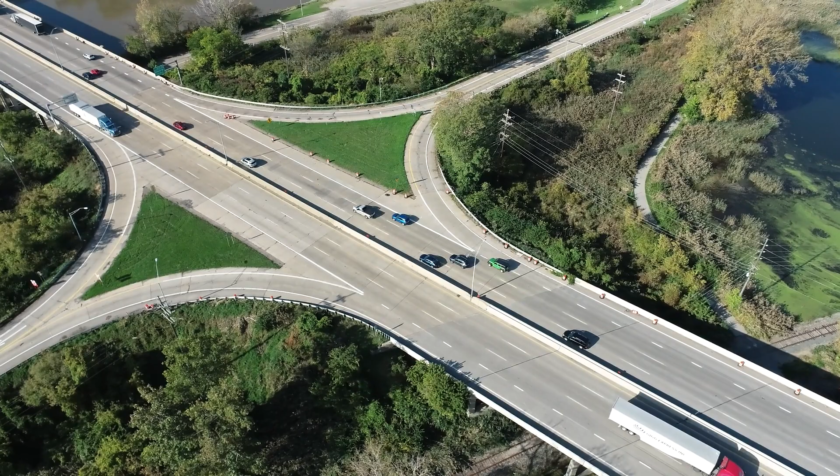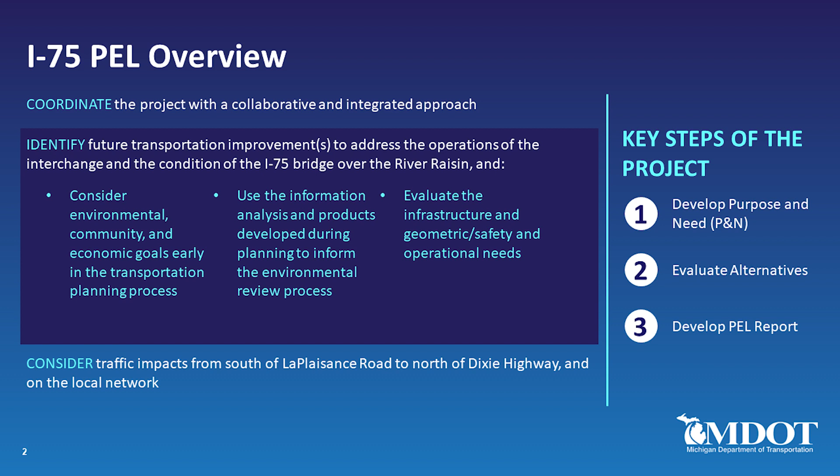To learn more about the Planning and Environmental Linkages, or PEL study, the Michigan Department of Transportation is conducting on I-75 in Monroe, Michigan. MDOT is using the PEL process to identify future transportation improvements in this area through a collaborative and integrated approach while considering environmental, community, and economic goals early in the transportation planning process. MDOT is building on previous studies conducted by the City of Monroe and others to understand the unique transportation challenges of this area and spark ideas for consideration.

The specific study area we are focused on is the I-75 bridge over the River Raisin, as well as the Elm Avenue and Front Street interchanges. However, we will study how any changes to this area would impact I-75, the Dixie Highway interchange, LaPlaisance Road interchange, and the local road network.

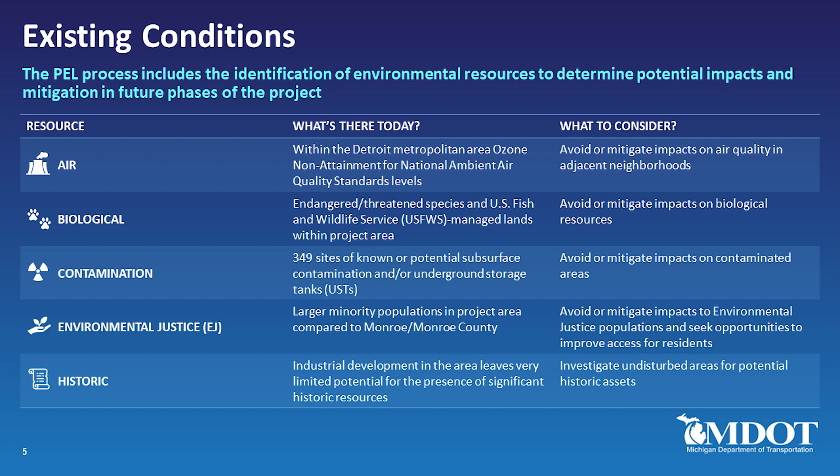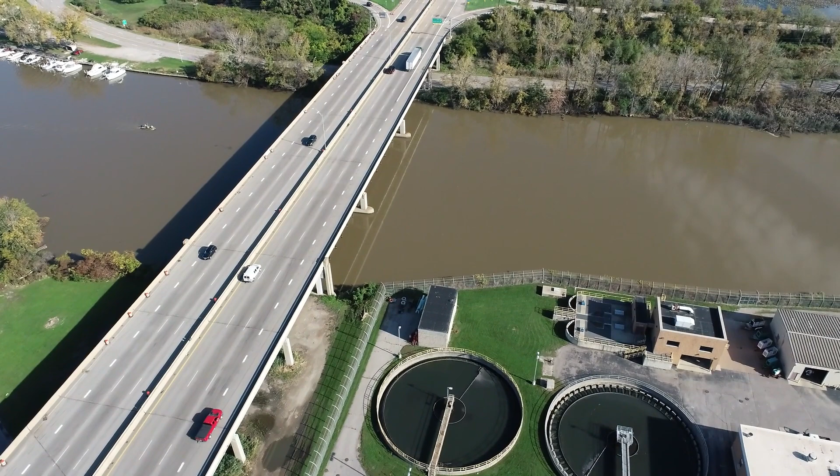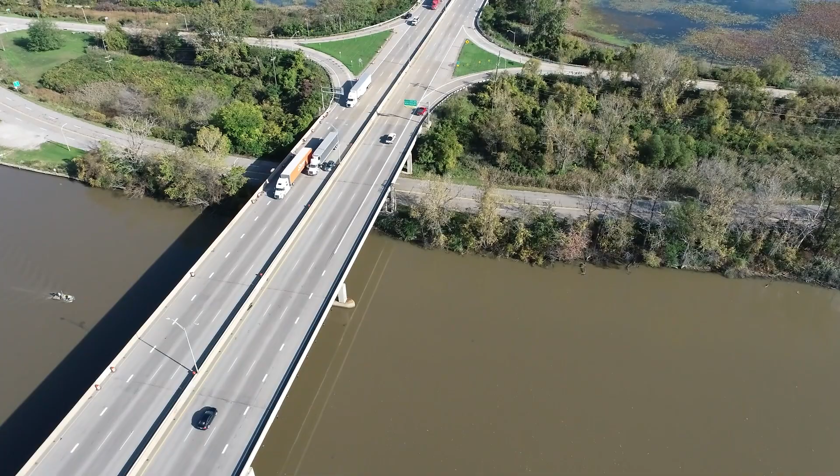The PEL study identifies environmental factors to determine potential impacts. These factors include air quality, biological, contamination, environmental justice, historic, noise, recreational, traffic, and water resources. The goal is to avoid impacts to environmental assets, mitigate impacts if they are likely to occur, and use the project to enrich these assets where possible. For example, by providing more access for environmental justice populations and improving connections to recreational assets in the area.

MDOT previously met with our local advisory committee, the community, and stakeholders this past summer to understand some of the current challenges and opportunities in this area. Key considerations identified at those meetings included traffic operations, active transportation, and access to recreational assets, continued industrial growth along Front Street, and the desire to create a gateway from I-75 to downtown Monroe.

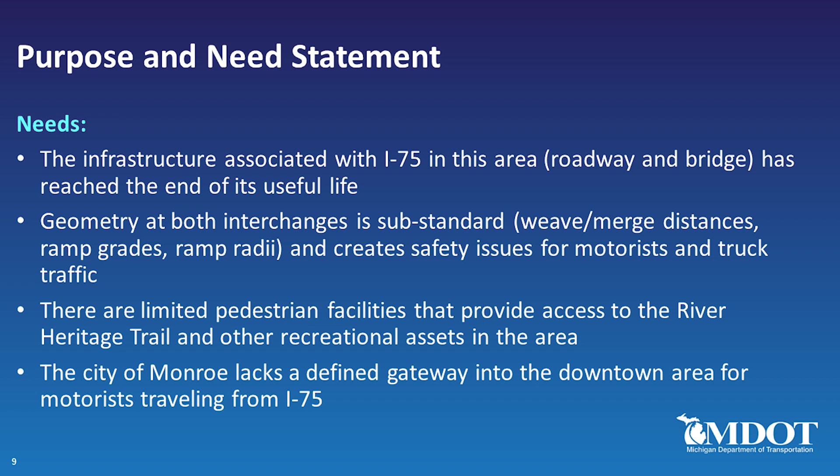Emerging from our engagement with stakeholders and the community was the purpose and needs statement for the project, which serves as a foundation of the PEL process and allows MDOT to analyze potential options to ensure they meet the purpose and need of the study.

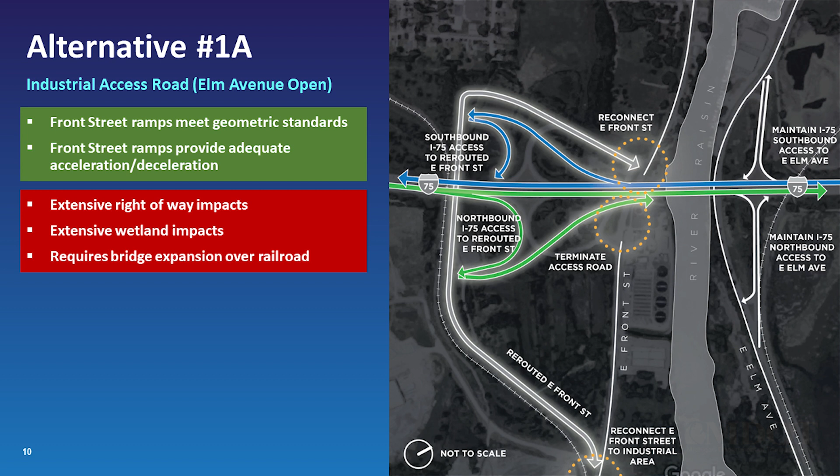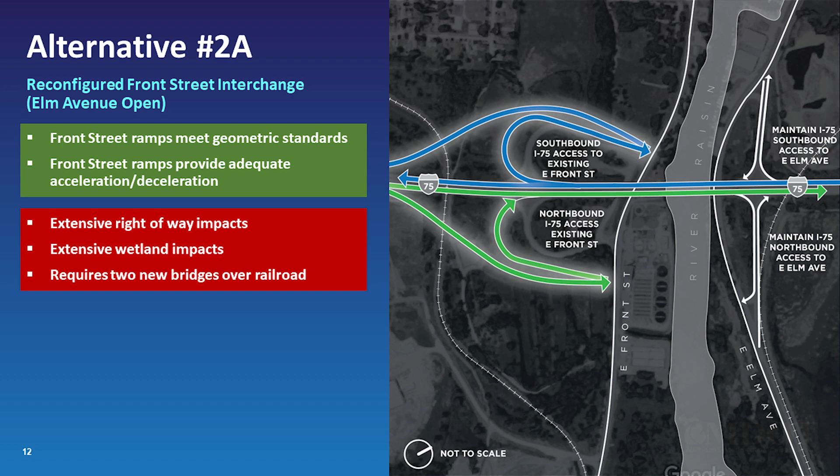Alternative 2A would reconfigure the Front Street interchange without relocating the street itself, allowing easier and safer access to the freeway with the same moderate improvements to the Elm Avenue interchange as in the previous alternative. This option would make the Front Street interchange much safer, but would encroach into adjacent property and wetlands, while also requiring 2 new bridges over the adjacent railroad.

Alternative 2B includes the same modifications to Front Street, but also closes the Elm Avenue interchange, allowing for safer merging and weaving of traffic on I-75.

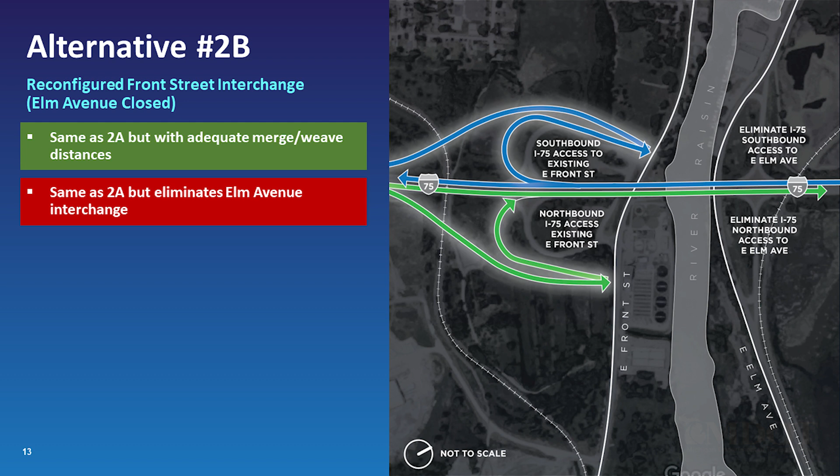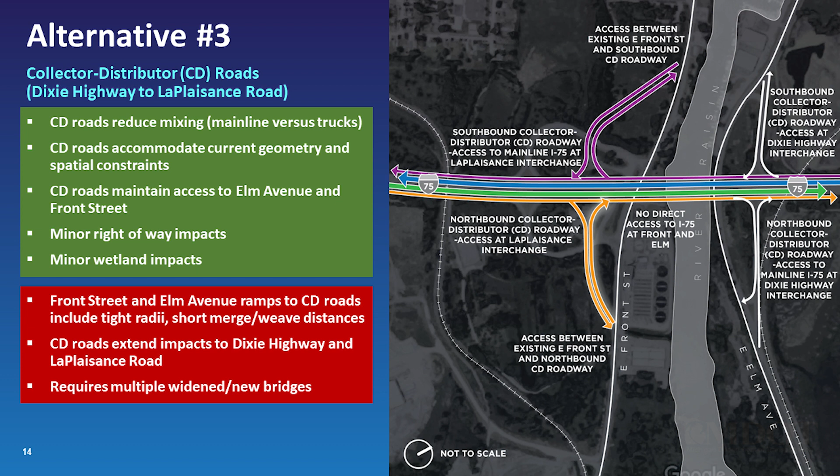Alternative 3 would introduce new collector distributor roads alongside I-75, which would maintain access to both Front Street and Elm Avenue interchanges. This option would allow traffic to access these new local roads without encroaching as much into the adjacent property or wetlands, but would require formal exiting and entering the freeway to the Dixie Highway and LaPlaisance Road interchanges.

Alternative 4A was one of the preferred options from the previous study and would realign Front Street further south of its current location and through the adjacent properties, again allowing easier and safer access to the freeway with the same moderate improvements to the Elm Avenue as previous alternatives. This option would make Front Street much safer, but would encroach into adjacent property and wetlands while also requiring expansion of the bridge over the railroad.

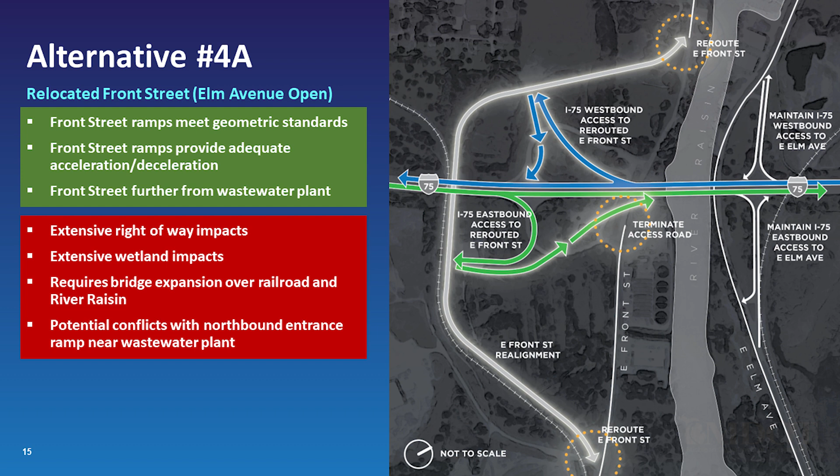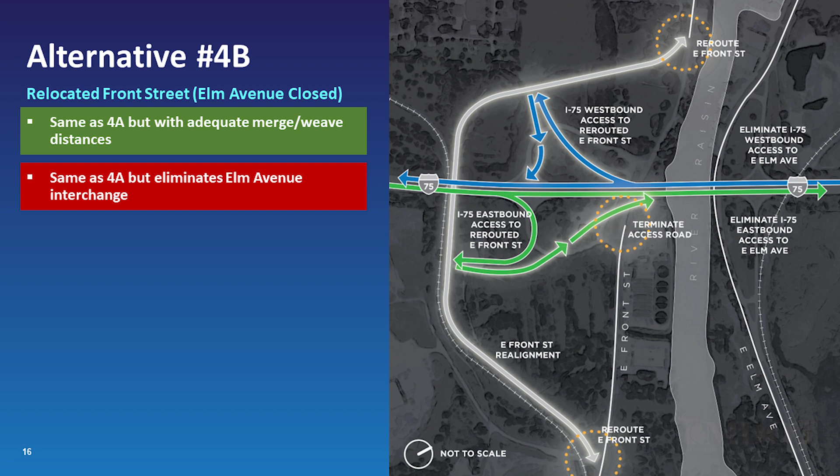Alternative 4B would include the same modifications to Front Street, but also close the Elm Avenue interchange, allowing for safer merging and weaving of traffic on I-75.

Alternative 5A would reconstruct both interchanges in kind to limit impacts to adjacent properties and wetlands, while improving geometry to make it safer and easier to access the freeway.

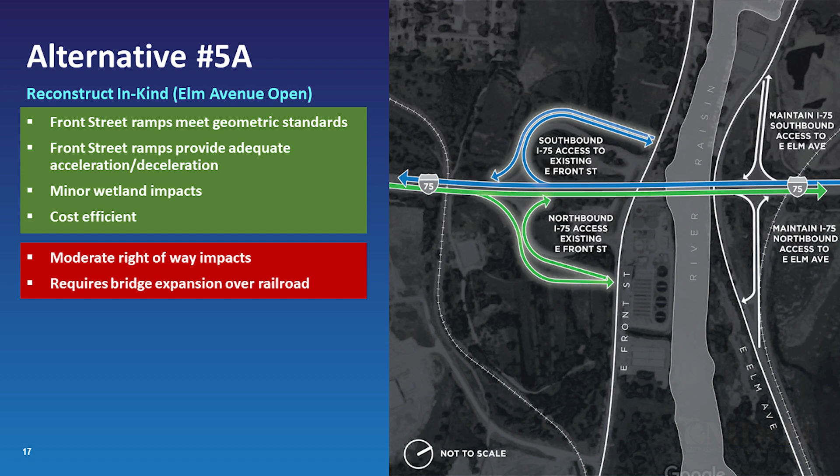Alternative 5B would include the same modifications to Front Street, but also close the Elm Avenue interchange, allowing for safer merging and weaving of traffic on I-75.

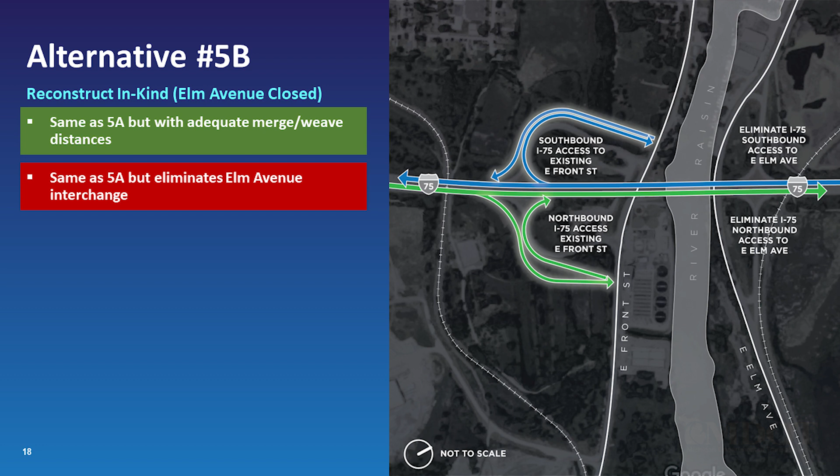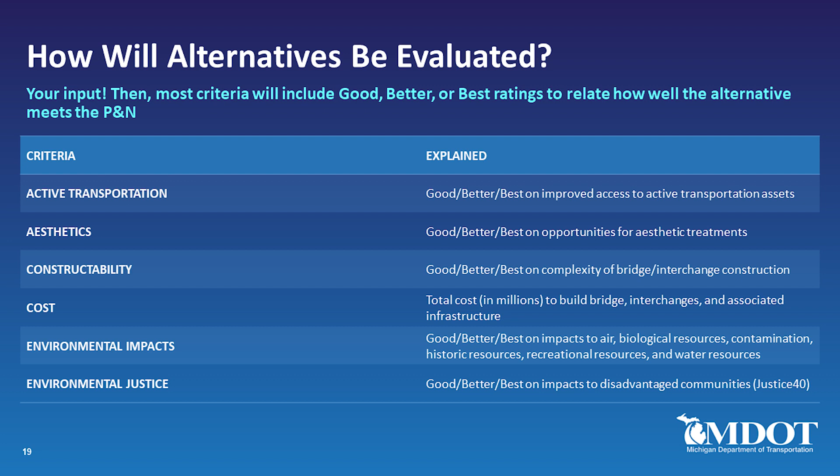These alternatives will be evaluated against a series of criteria to determine how well they meet the purpose and need of the study, including active transportation, aesthetics, constructability, cost, environmental impacts, environmental justice, maintenance, right-of-way impacts, safety and operations, and wetland impacts. MDOT will take your input and the results of the evaluation process to refine options down to two practical alternatives that will be presented for consideration in early 2023.

We will then look to refine those options down to a single locally acceptable alternative by spring 2023 and finalize our report.